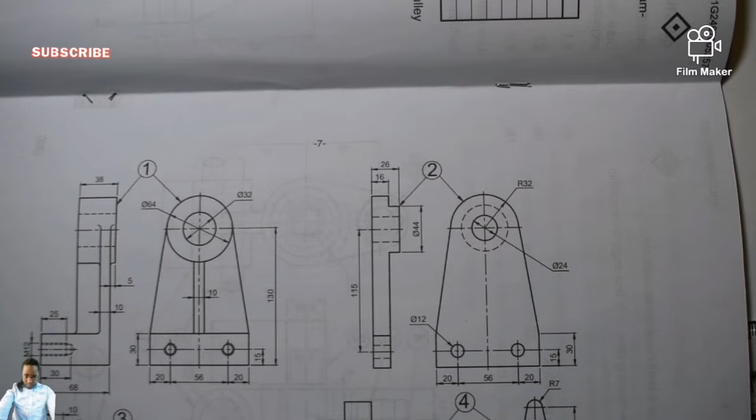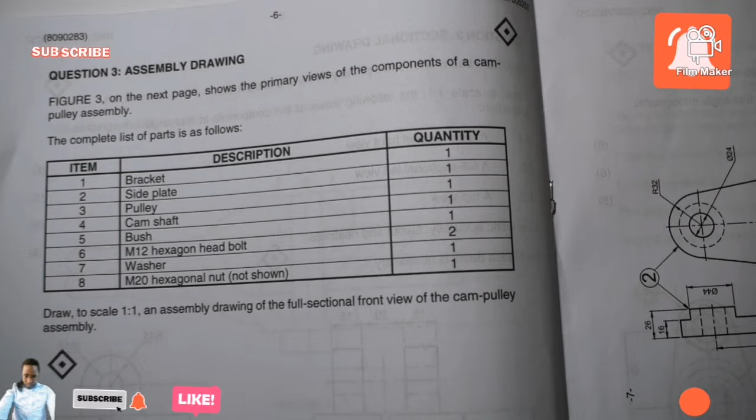So let us quickly do the correction of this paper that was written on 7 August 2024 of engineering drawing N3. So I want us to look at question 3. These are the questions. It's question 3, assembly drawing. Figure 3 on the next page shows the primary views of the components of a Cam-Pulley assembly.

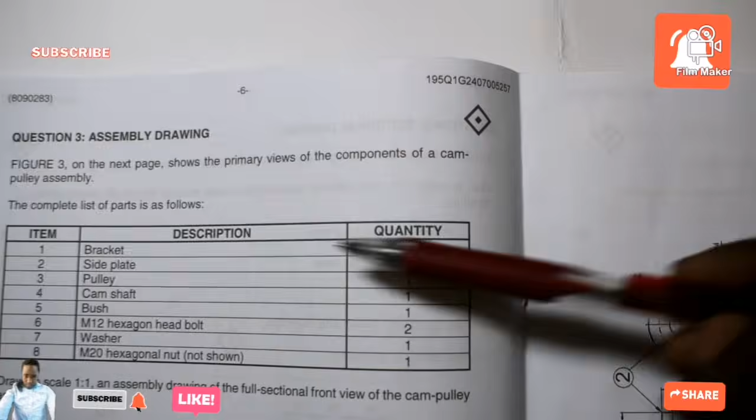So this is the parts list that is very necessary for you to have. You have to get this parts list because you cannot do anything here without it. So we have item 1 up to 8 with descriptions. The description is the name of those items. Quantity: how many times are you expected to draw that particular item? So we have to draw item 1, item 2, item 3 up to item 5 once.

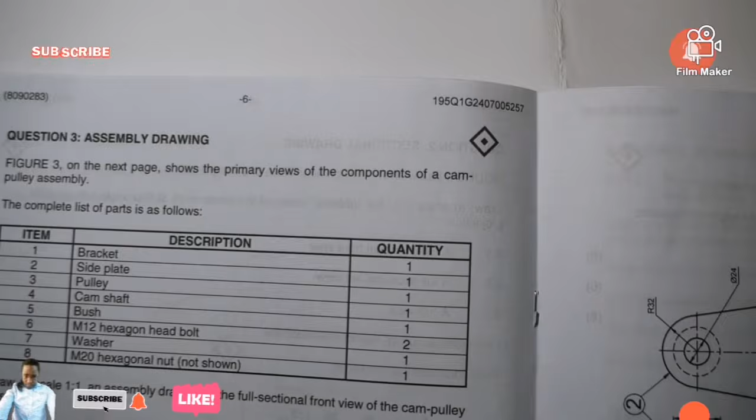Only item 6, which is the M12 hexagonal head bolt, has to be drawn twice. Item 8, which is the M20 hexagonal nut, is not shown. Before we go further, let's also read the question. Draw to scale 1:1 an assembly drawing of the full sectional front view of the Cam-Pulley assembly. Simply, draw a full section of the whole assembled part.

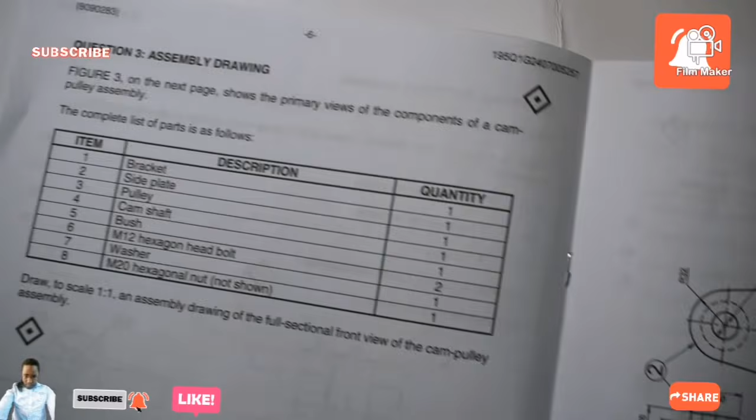I'm trying to be fast actually. So these are the views that we are having. They are not like the way we were given in the previous question paper; the views are in landscape. So that's how you have to read these items, in a landscape format. What tells us that is the projection symbol.

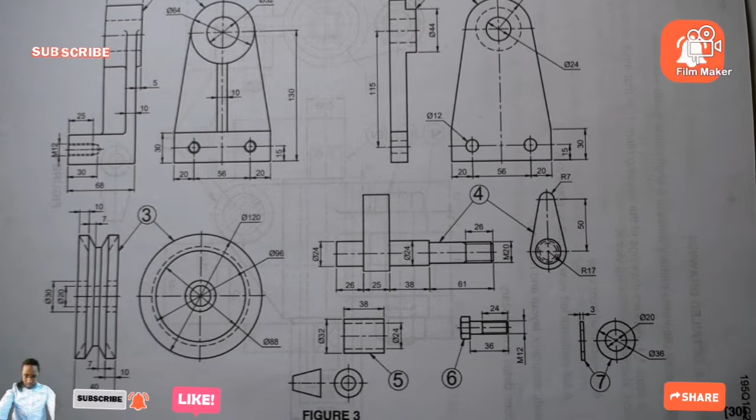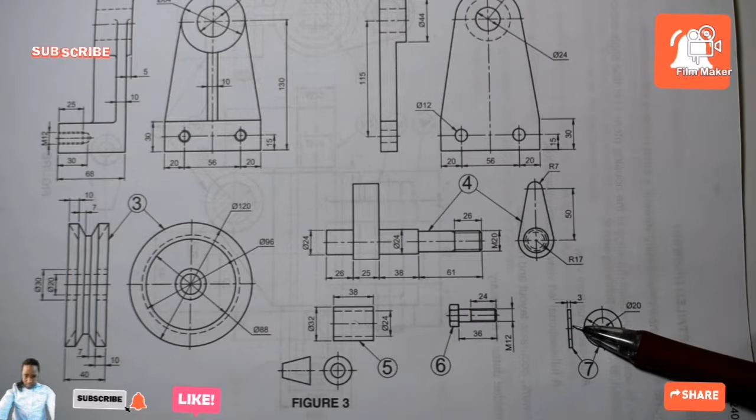So this is first angle orthographic projection, which means this is the front view of item 1, this is the left view of item 1, this is the front view of item 2, this is the left view, front and left view of item 3, front and left view of item 4, front of item 5, front of item 6, front of item 7, left view of item 7. So now let us draw.

I am not going to explain much how you analyze this type of topic. If you are still not sure about it, I've got videos explaining how you join and assemble different parts, how you see what is supposed to fit where. So here I'll just draw, since it's just a correction. I'm going to start with item 1. I'm trying to be fast.

So I'm going to start by drawing item 1. And bear in mind that item 1 is a full section of the front view. So I'm going to start with a faint horizontal line like this. Then somewhere I draw another faint one going like this. So these lines are faint.

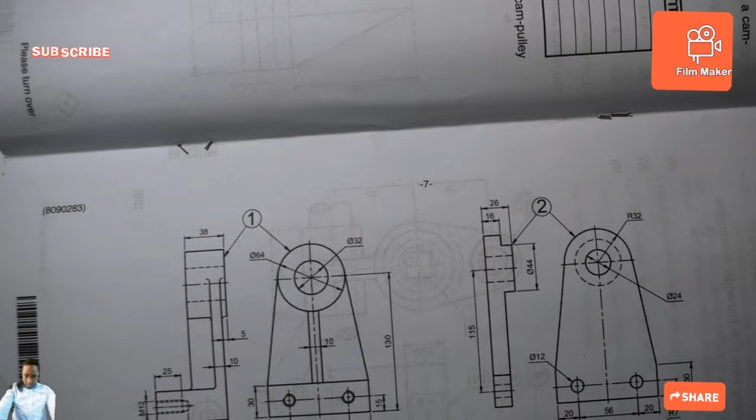Where they are perpendicular to each other, I am going to put that point of my item 1. Remember, we are using a scale of 1:1. So from here till here is a dimension of 68 millimeters.

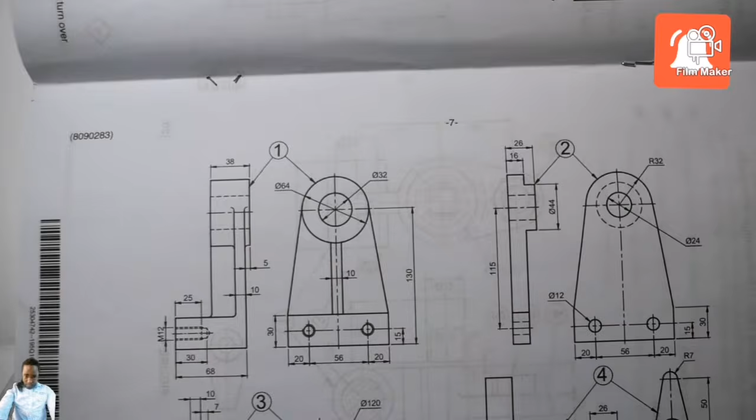68 millimeter. Position it nicely. Yes, I think it's fine like this. So now I'll take my 30 millimeter, 68. There's 68, right here. Then I draw dark from here till the 68 millimeter. So now I see it going up as a faint line, so I draw it faint as well.

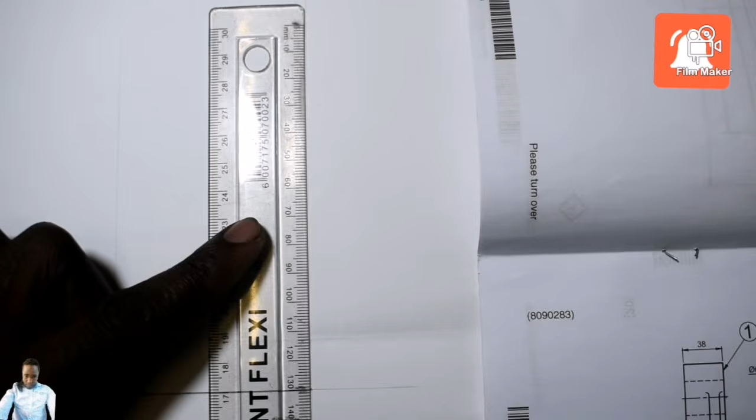So what is the height now? From here till there is how much? 130, which means from here till there is 130, and that 130 is actually at the center. You understand? So I'll do that. This 130 I can do it here or here, still on the same thing. 120, 130, which is this one. So there is my 130.

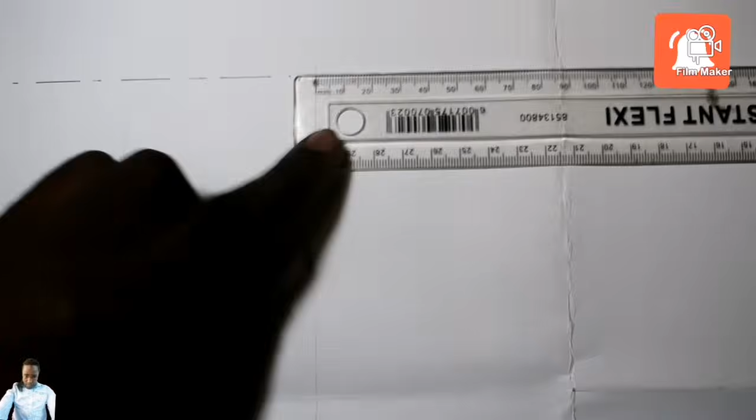So that 130 is giving me the horizontal center line. So I can draw the horizontal center line there. You understand? So now this point is good, as if I'm at this point now. So I'll go this direction with 5 millimeter. So there is my 5 millimeter. And then I construct a vertical faint line.

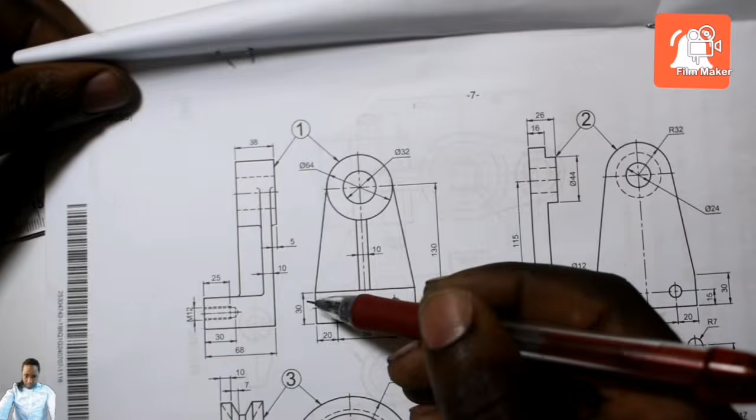Then after that, from here till there is how much? They said it is a diameter 64. So diameter 64 divided by 2, you are getting 32. So I can simply open it at 32. Then I come and place it here, mark here, and mark right here. So now I have a faint line going this direction. So from here till there is the 64, isn't it?

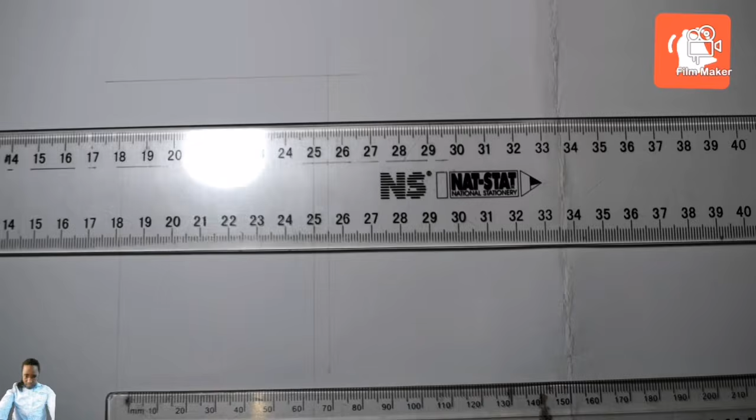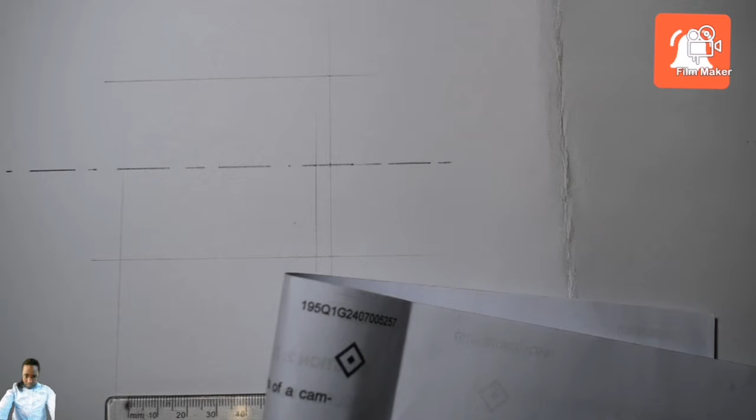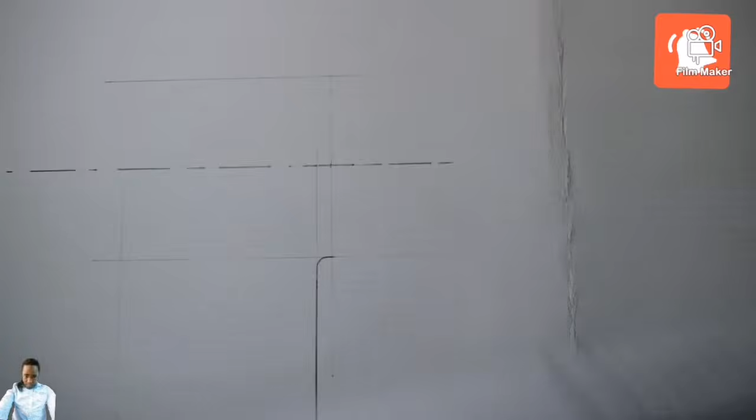Then now I have another one that is going to behave like this. Then from there, I can have this one. Now I can draw that one, this one, that one. There you go. If we are not given the radius, this is what we are going to use. Just try to be accurate. So there you go. So this one is actually that one, thereby our item 1.

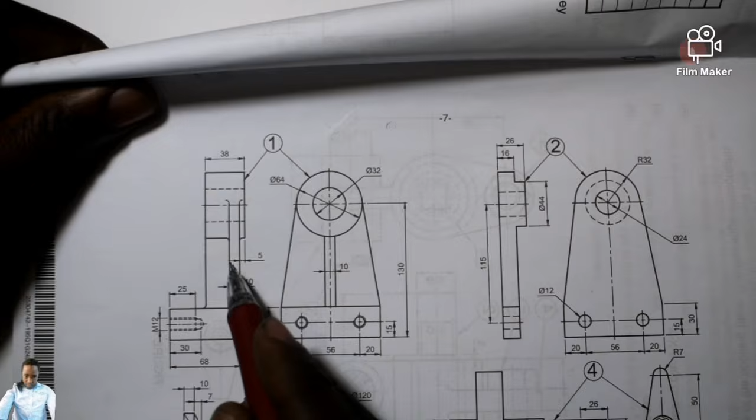So now I am going to record the thickness of item 1. They said it is 10 millimeter, from here till there. You can do it right here. So this is the 10 millimeter. After getting that, you can simply construct a faint line.

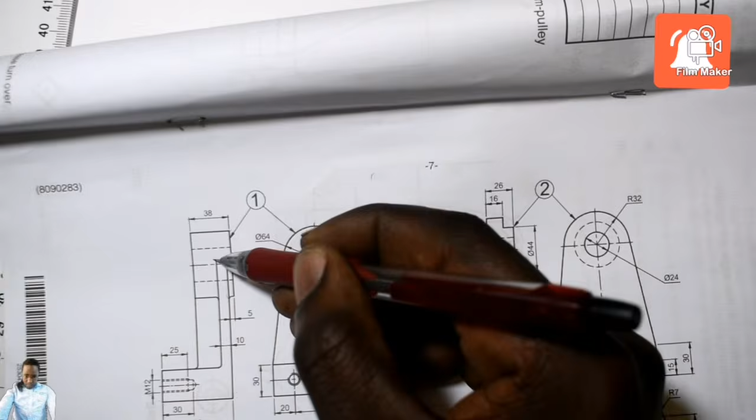So if we cut here, this one from here till there will disappear. Remember, we cut to expose the inside view, isn't it? So I don't need to draw this one. It will disappear. Okay, so now I can get this one.

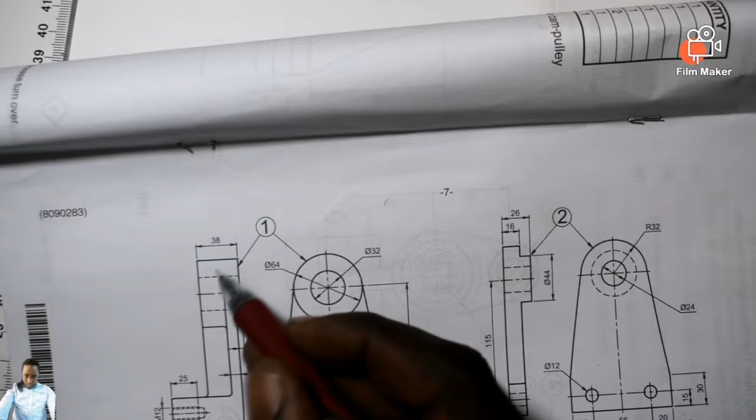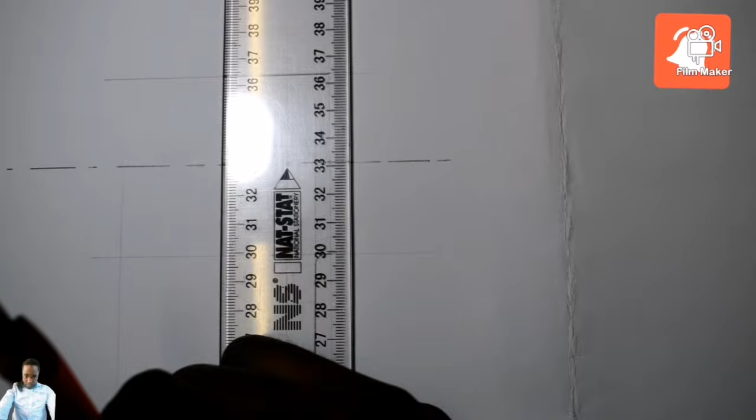Before I get that one, let me correlate that 38 up there. So I can simply record it from here till the 38. This is 38, because this is 39, this is 40. So I can have it dark till 38. Then I can construct it vertically down like this. From here till there, I cannot draw it dark yet for now.

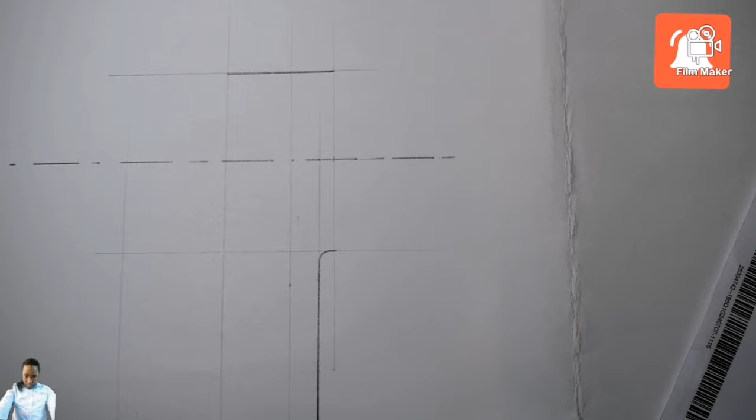So now let me go back down here. From here till there, should I draw it dark? Yes, I can draw it. I can close it dark down there. So now we see a vertical dimension from here till there is 30. So that 30 I can do right here. From here going up is going to be 30 millimeter.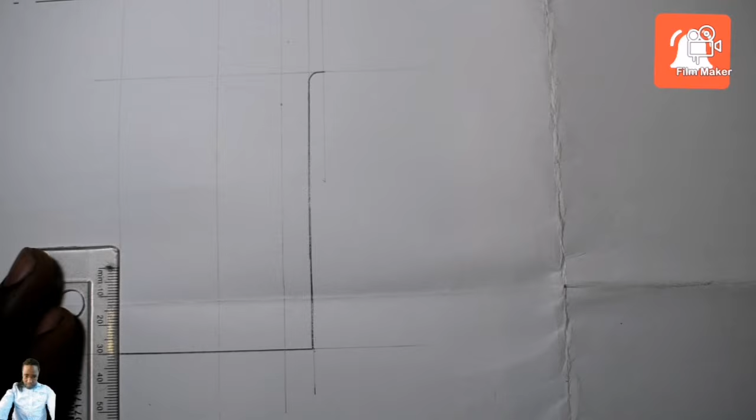Let me also get half of 30, which is 15. Why am I doing that? Because there is an internal thread there. They said from there till there is a dimension of 30. So there is an M12 internal thread that I have to deal with, so it is necessary to get the center there. There is the center, and this one I'll just draw faint for now.

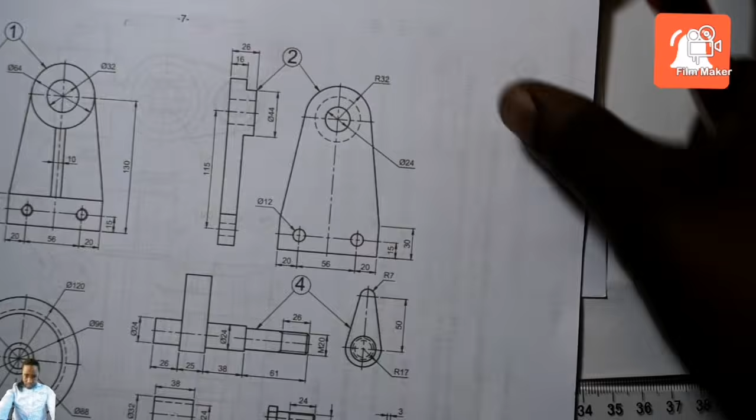Okay, so now I have this one. You see that it's not a sharp corner, and even this other one is not a sharp corner. So I have to use this method. So there you go. Even here.

So there you go. You understand? Then from there I can do the same thing here, which is going to be this one. So there you go, which is this one, which is that one. You understand? So from there till there to disappear, it will also disappear there.

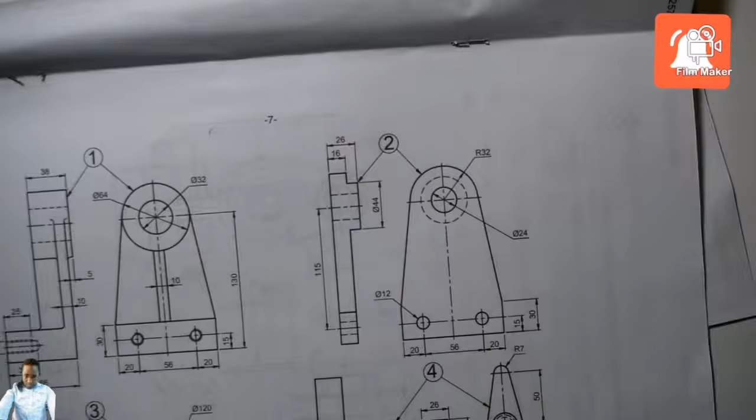Okay, so now let's see. We seem to be half done with our item 1. So item 2, are we going to attach item 2 into item 1? So you see item 1, check the left view of item 1. It has got an internal thread, and correspond that with what? With item 2. Item 2 is also having diameter 12, whereas here the thread is M12. So it corresponds, which means we are going to attach item 2 right here.

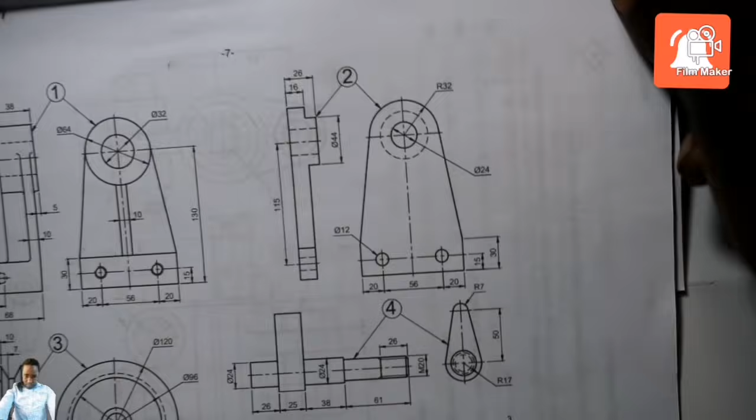Right here. So how are we going to attach it? It's still the same dimension. Remember, I used to say two or more things must agree in this topic of assembly drawing. The dimensions must agree, that indeed this one is fitting there, as well as the shape of your item: the shape of the item you are fitting is supposed to tally with the one you are fitting into. You understand? So without fear or favor, I can take item 2 now and fit it here in item 1.

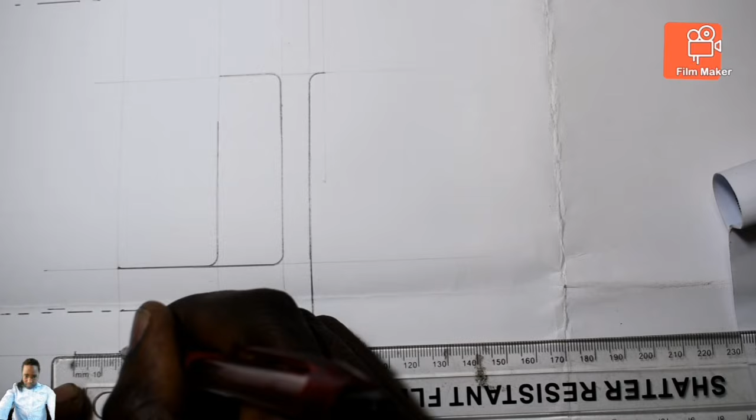How? So from here till here is 30, which is the same as that one, which we've done there already. So I will simply get the thickness, because from here till here is 16 millimeter. You understand? So I can simply record the 16 millimeter. This is 15, this is 16 right there. There is my 16 millimeter. So I can simply extend this one, but I know from here till there is where item 2 begins. You understand? So now take it up, faint. Take it up, faint, and let's see what is going to happen now.

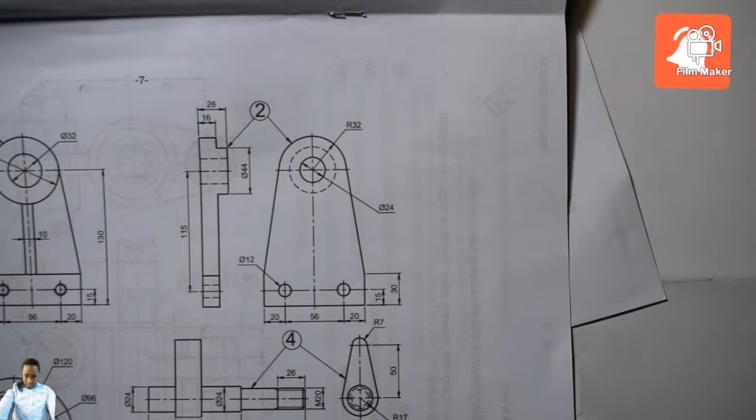It's of a height of 115 millimeter. Do you see? Of a height of 115 millimeter. From here till there, which is the center to center, is 115 millimeter. So that 115 millimeter, I'll record it from here till there. Let me see. You see, that is absolutely correct. There is our 115 millimeter. So there is no need for us to record that one if it has already come out by itself.

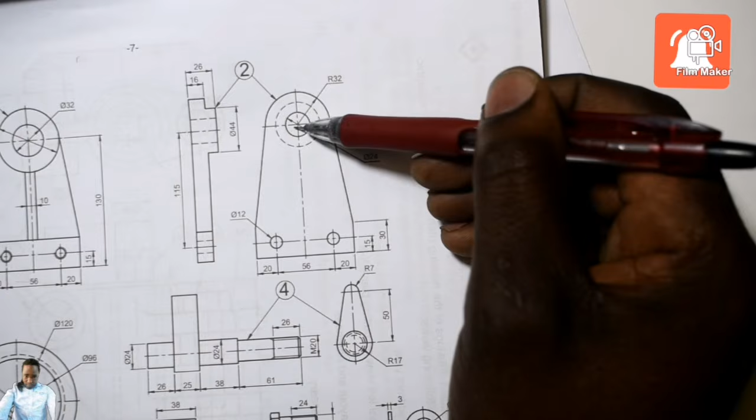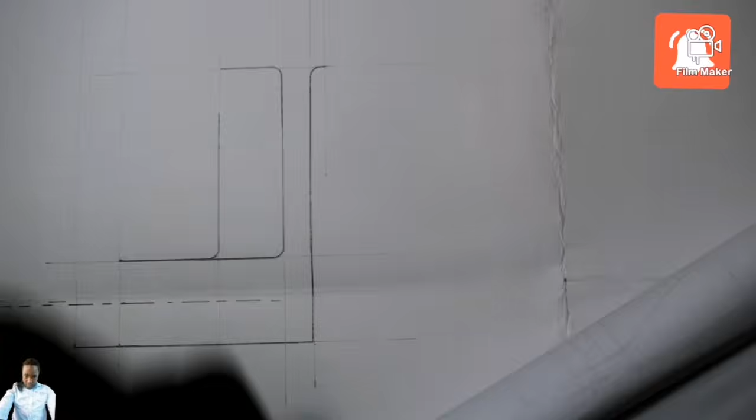Okay, so from here going up is what? It is the radius of 32. So from here till there is 32. So which means, excuse me, I'll record the 32 right from this point. You understand? So 30, there is 31, 32 right here. And the 32 seems to tally with this one. Yes, it's actually one and the same. Double lines are not allowed.

You know, I'm drawing it 90, so I don't. So it's still the same there. So which means I can draw this one dark now without fear or favor. This one from here till down there is supposed to be dark. Supposed to be dark. Which one is that one? It is item 2. Let me do it like this.

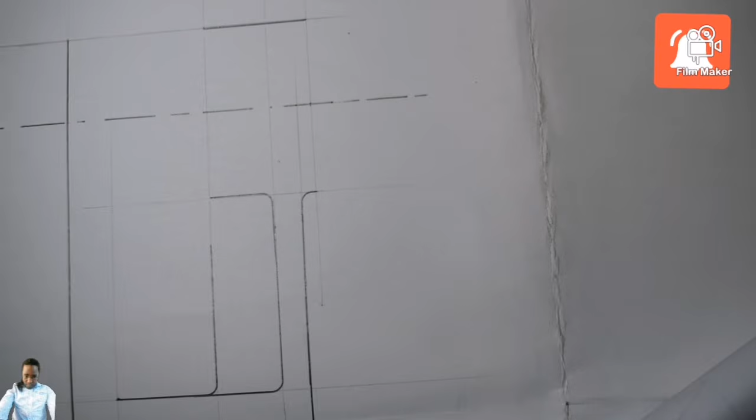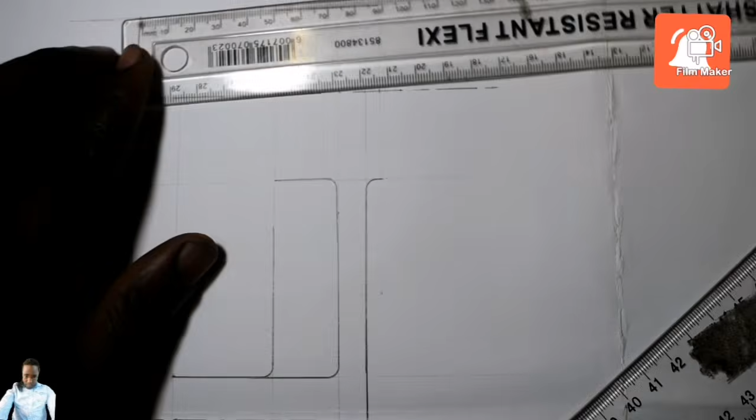Yes. So now this point from here coming this side is how much? It is 26. You see, they told us it's 26 millimeter. So I'll record 26. From here I come this side. There is my 25, my 26 is right there. So I'll have it dark from here to right there, and I take it faint. No, let me check it next.

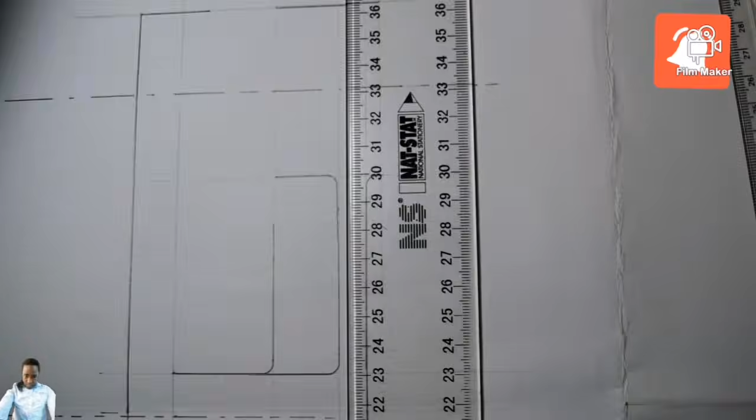Okay, from here till there is the 26, but remember the 16 millimeter. So I am wrong by extending it dark till this extent. It's fine, I'll use an eraser. So from here till there is that 16 that we started with down here, isn't it? Which is the same as that one. So the 26 millimeter is actually from here till there, which means I have to erase here, my brother. Erase here.

So after erasing here, how about from here till here? From here till there, we are told it is diameter 44. So 44 divided by 2, you must have your calculator. 44 divided by 2 is 22, and the 22 you are going to record it right from the center, which is this one. So I'm going to say 22 this side, 22 this other side.

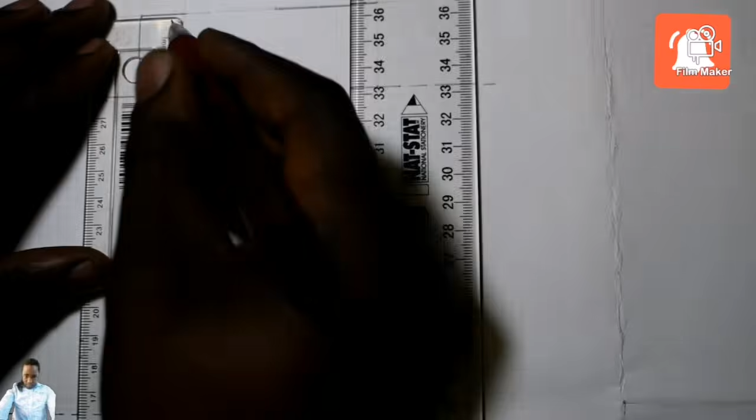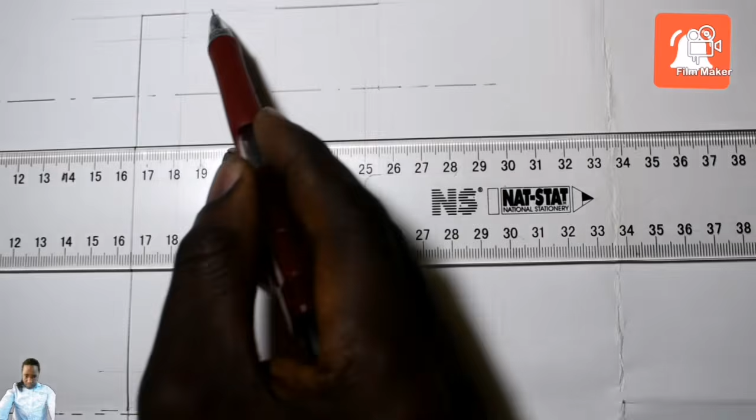So 21, 22 is here. So I mark it 0 and mark it 44. This 45, there is my 44. You understand? So from there I can now have this one faint and have this other one faint. So the 26 was actually ending there, so I can construct this point down. This one down faint, you understand, so that now I can have this one dark.

There it goes, and this one goes dark till here. Keep on breaking, which is this one, you understand. So again, I can have this one down here. Where's my 22 ending? Actually ending there. So I can have this one dark from here till there, and this one, is it a sharp corner? Yes, it's a sharp corner, you understand. So I can have this one dark till there, you understand.

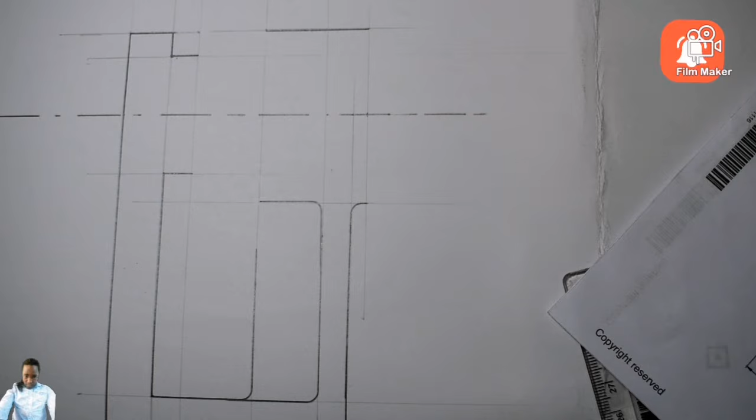But then I cannot draw it dark here, from here till here, because there is an internal thread that has to be exposed there, because we cut to expose the inside view. Okay, so now again, this part I cannot draw it dark yet. So from here till there, you see I'm pointing to my front view, item 2. So from here till there, we are told it is diameter 24.

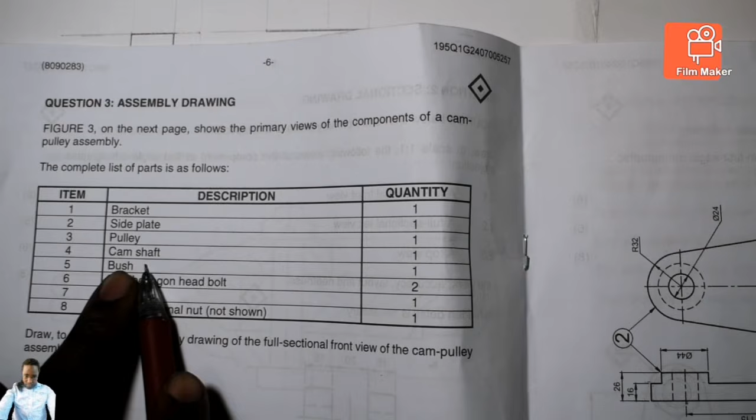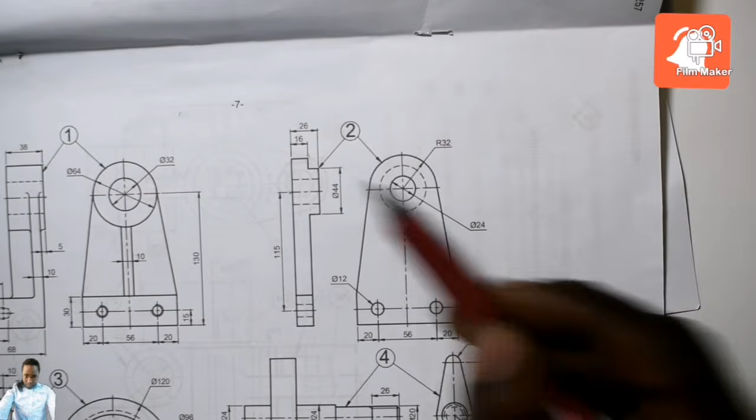So what is going to be running there? Item 4, which is a shaft. The name of item 4 is the camshaft, you understand. This one is actually a follower. So this part of item 4, your camshaft, is of diameter 24, which corresponds with this one, diameter 24, from here till there. And its length is 26 from here till there. So that one corresponds with item 2, from there till there, you understand.

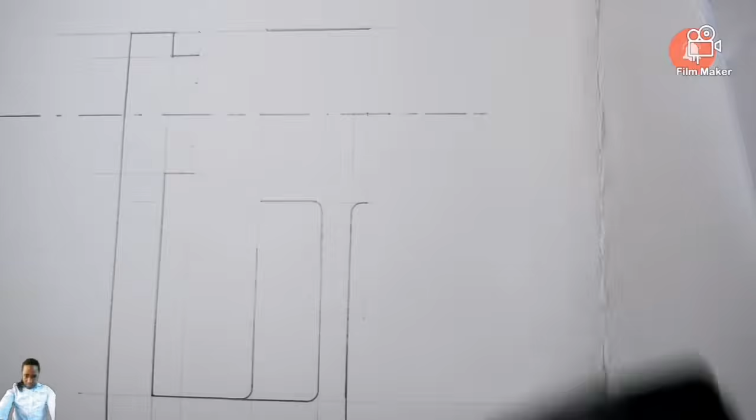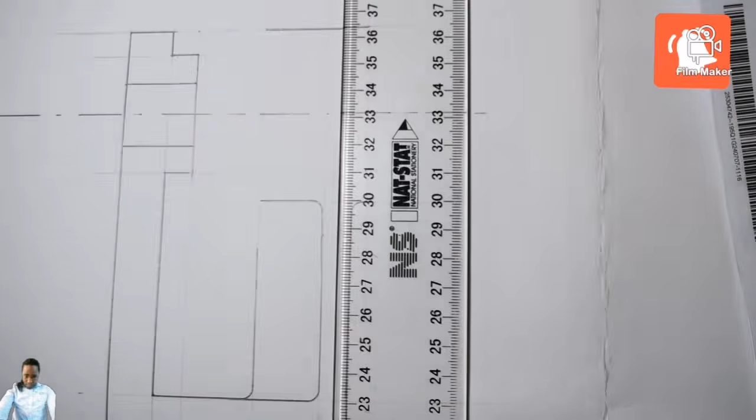So by drawing this one, I say 24 divided by 2, we're getting 12, isn't it? So I come here, this is 12, this is 12 right here. So I mark it 0, I mark it 24, this 25, my 24 is supposed to be there. And I draw this line dark, there it goes. So I draw these ones like this and close this portion of item 2; I assume it is the part of item 4 already fitted there, you understand.

Why am I closing here? Because item 4 is closed, and a shaft, we do not section a shaft when it's cut along its length. When it's cut across, that's when we expose a shaft in sectioning. Are we together? So if we were to section item 2, we're going to have this one dark, and this one will disappear, this one will disappear. You see, not always do hidden lines become dark.

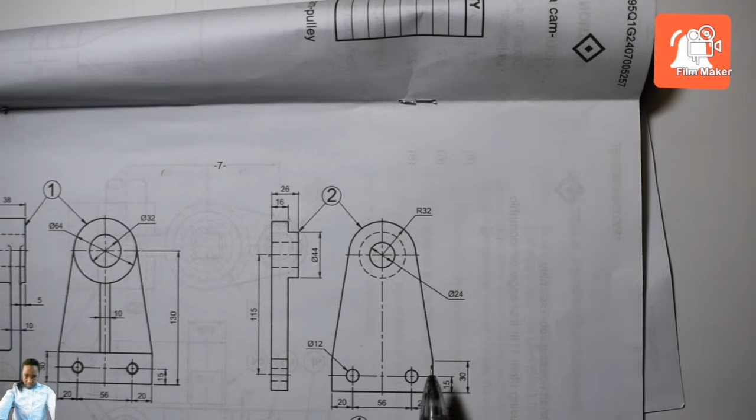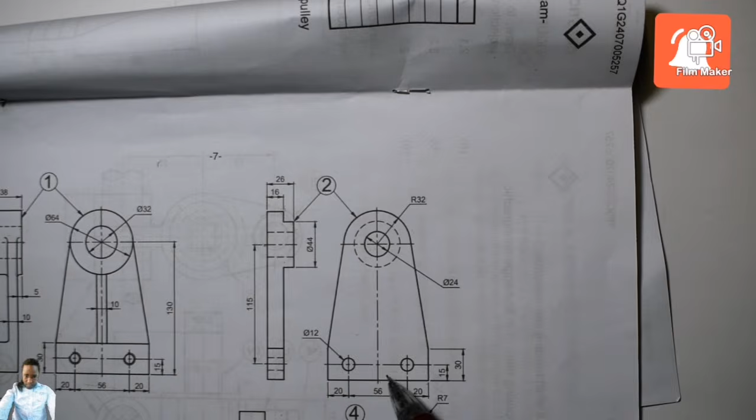So we have hidden lines here, which are actually about these 2 diameters which are in the same line, you understand. We are having 2 holes, but in the front view, their dimensions seem to be talking about 1 hole. Why? Because these 2 lines are in the same line. So now if we cut here, do you see that the hacksaw was actually cutting in the middle? There you go, it was actually cutting in the middle.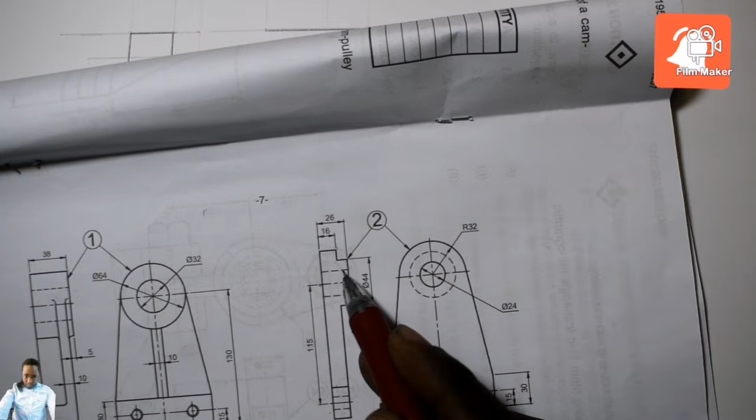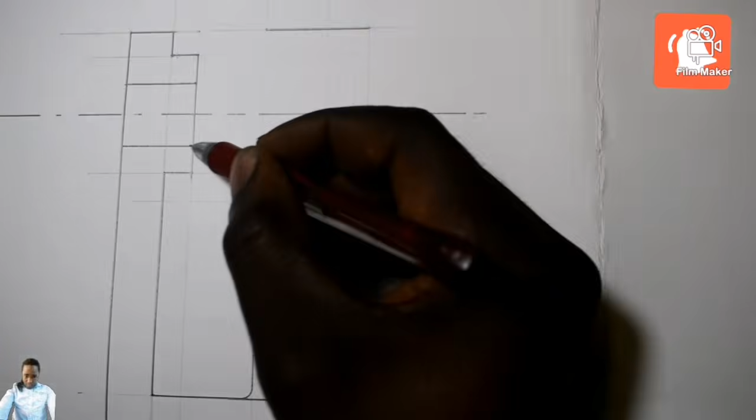So then we have hatches here. This one will change to dark, will jump here, change to dark, we have hatches there. You understand? So then if I am saying I decided to draw this one dark, I assume my item 4 fitted there. So now I'll come to say, how about the diameter or the dimension from here till here? From here till here, they told us what is radius? Radius 17. So which means, right from here, it's simple, straightforward. Right there, I'll record a dimension of 17 millimeter. So there's 15, 16, 17.

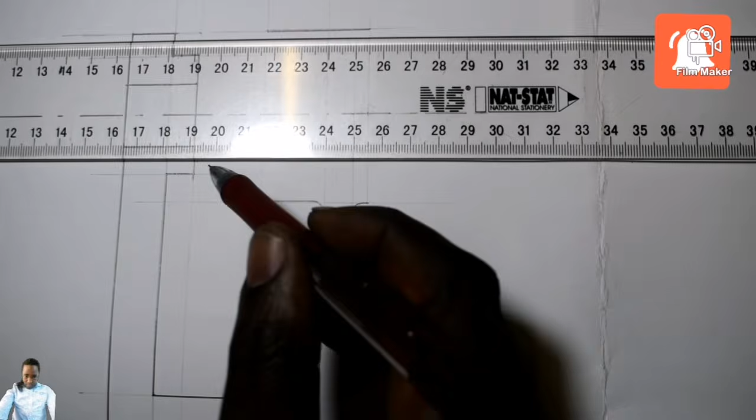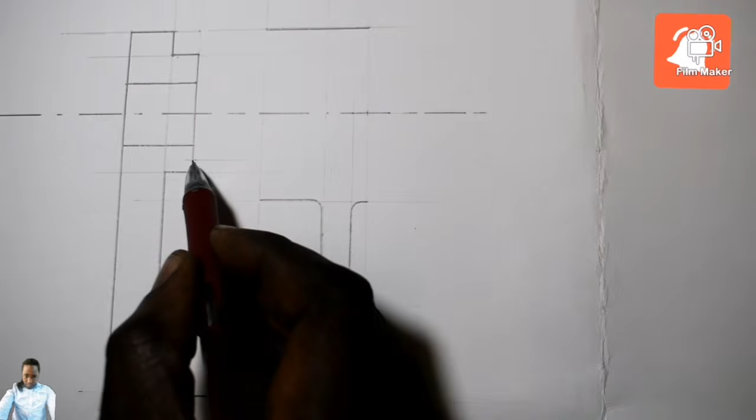So once I get that, I just construct a horizontal faint line. Are we together? Then from there, what is the thickness? The thickness of it. This corner is which one? In our drawing is that one now. So from here till there is how much? Is 25. So which means I can record the 25 right here. 25 right here. So you see the 25 is ending exactly where this part of your item 1 ends.

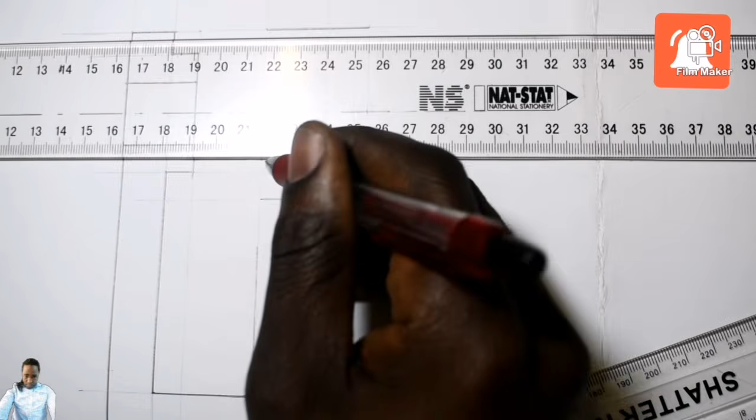It shows that we are actually at a right track. Even in terms of our dimension, we are still at a right track. You understand? So now you see that is ending there. So which means we are at a right track, and it makes me happy. Even though I'm drawing at night, I am still accurate. So then let's see what is going to happen now. Then I'll take it up as well. Remember, we're drawing item 4 fitted in item 2.

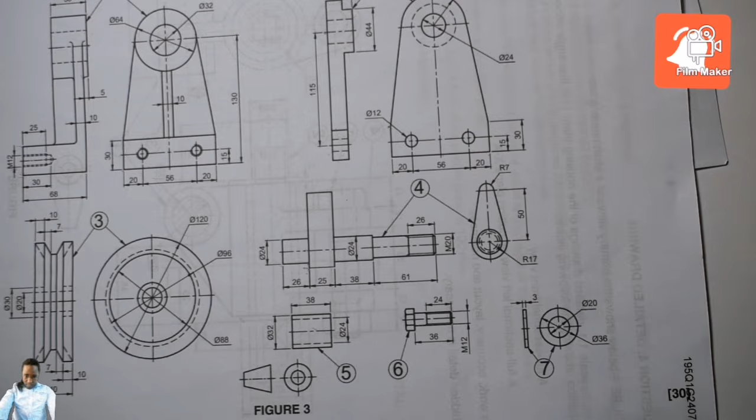So what is the height now from here to there? Because any dimension behaving vertical, we can give it a name as what? As height. So how about the dimension from here till there? We are told, you remember, this is the shaft or item 4. This is the front view of item 4. This is the left view of item 4 according to this particular symbol of orthographic projection, which is the first angle orthographic projection.

Why are you laughing?

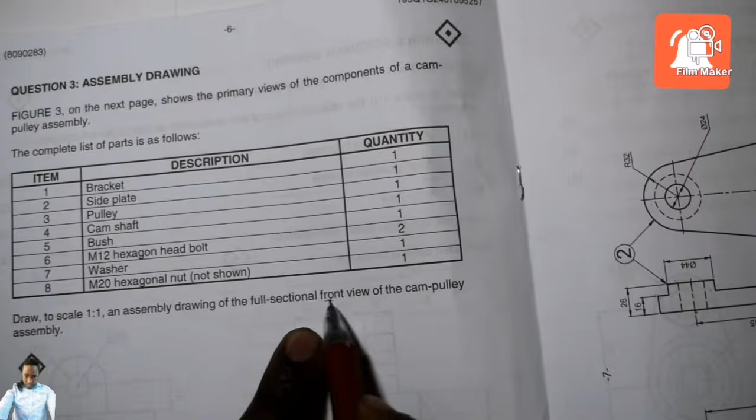So then where are we? Remember why I came to this point. I wanted to emphasize the point that the question said a fully sectional front. So that is why when you come to our items, we'll be concentrating on the front views only. We draw front views only. You understand why? Because the question said a full sectional front. Okay, that's not the point. So the point is we are looking for the height from here till there.

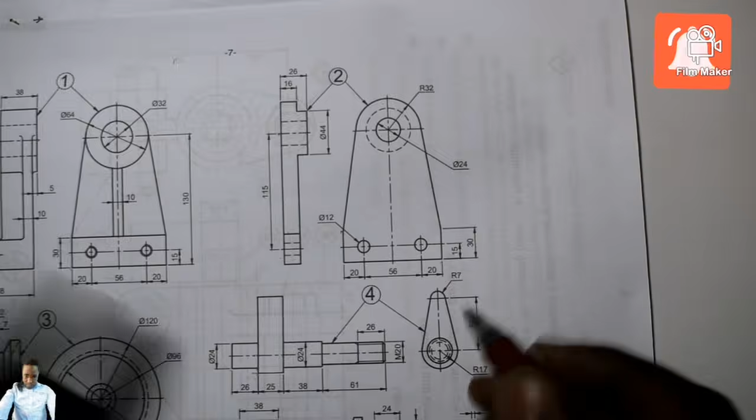We are told that is 50 millimeter, and that 50 is still giving you the center. You still have to add 7 millimeter, isn't it? And check it nicely that 50, my brother, is not starting here. It's actually starting there by the center. You understand? So from the center going up is 50 millimeter. So I'm going to do it where this is my center. So 50 is right here. So I mark it. There is my 50 ending.

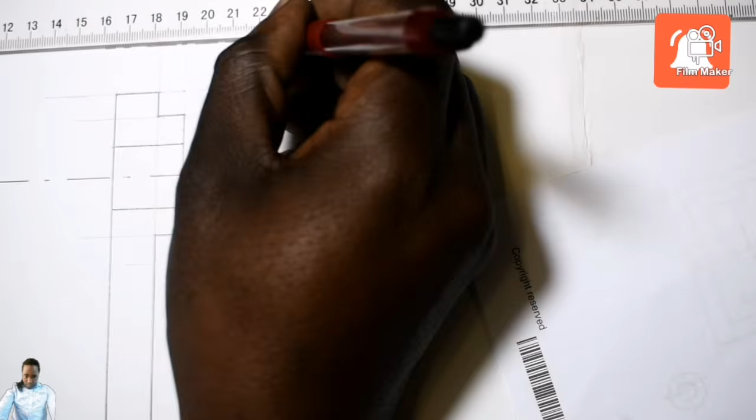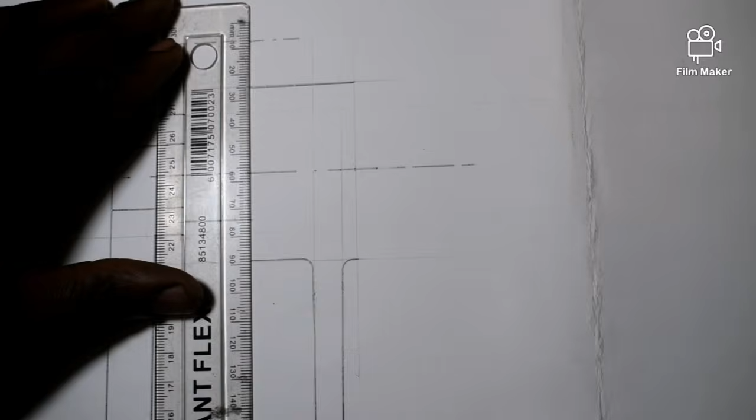So I am going to put the horizontal center line. How do we draw a center line? Long, short, long, short, long, short. So then they told you we are still having a 7 radius, a 7 millimeter radius. So you still have to add the 7 millimeter. So from there, 5, 6, 7 millimeter is that one. So there it is. You understand?

So once I get that, without fear or favor, my brother, I can just simply draw it here, dark from here till there. Dark, and I come back and have this one. You understand? So this one as well.

And then from there, where are we? We are having this one done. So now we are having, it's still the same diameter, 24.